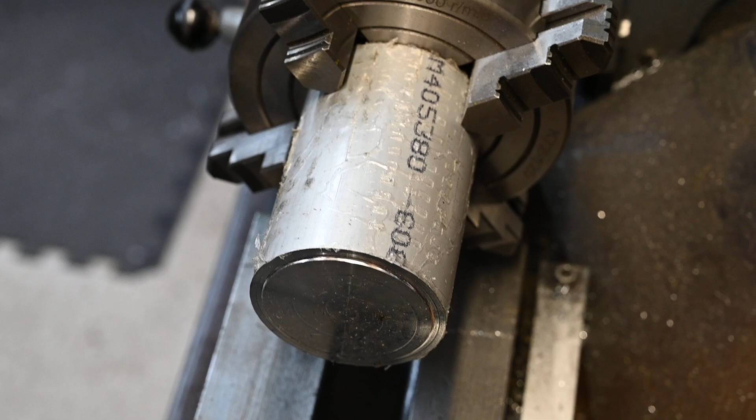Right, this is a piece of 7075 T6. This is going to be for the cylinder. There's a very small amount of lathe work to do today, so let's just get that done and then we'll be over to the mill for probably the bulk of this. I don't think it'll go back in the lathe again.

Well, that's the lathe work complete. This is the part we're forming, and that forms within the stock. This is the stock around the outside, and we've got to form this part there. So we're going to take it over to the mill now and do this part.

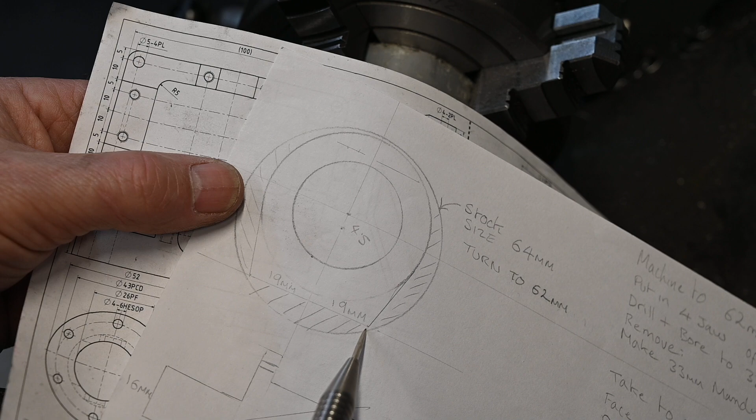I'm not sure if I'm going to part it off. I might part it off, or I might take it over to the bandsaw and cut it to length, but then we'll be over to the mill to machine this flat face, which will give us a second reference surface. We've got a good reference surface here.

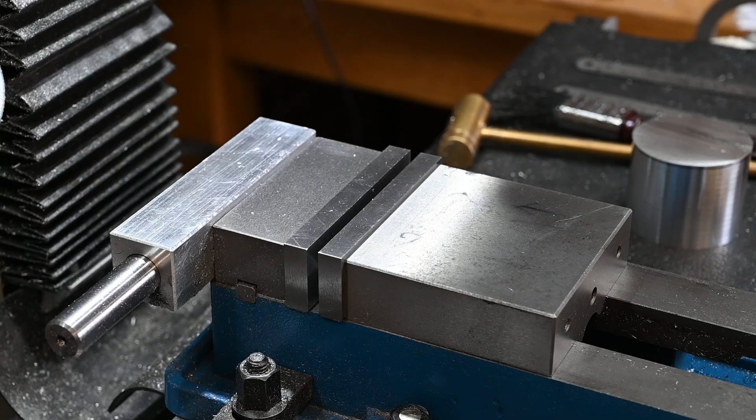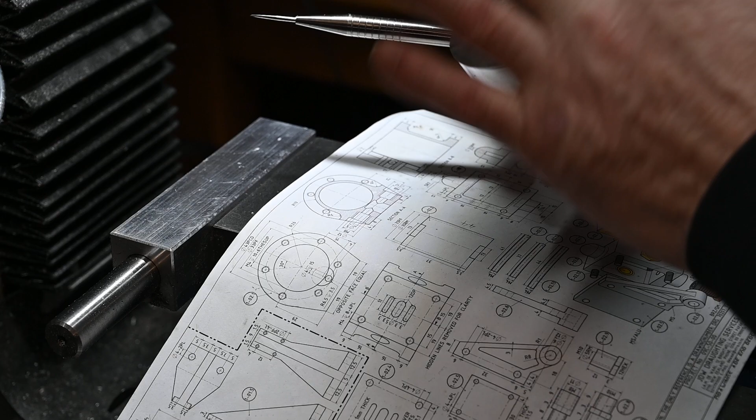The first job on the mill is to get the 19mm face, or the 38mm face. First job is to get this face milled off on that edge. I'll get that milled off and then I can get this down to size, but that's the first job, mill that flat.

Not too worried about marking the outer surface slightly, because that will come off eventually. This is just the slug for the final project. Right. Should be tight enough for that.

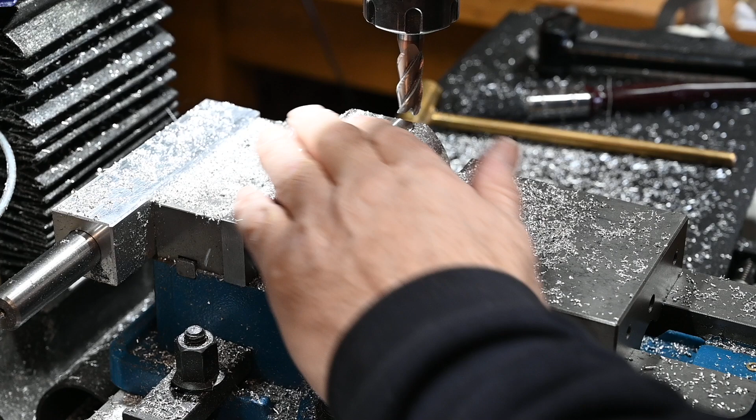Spot on. Right, we've got that faced off now to 38mm. It's a nice finish. Probably doesn't look that nice to you, but these little tooling marks, you can't feel them. So that's down. We've got a registration surface there now, and we've also got a registration surface there now, so we can start by there.

There's a little dimple in the middle of that, or is it on the plate? Yeah, it's just that little dimple in the middle. I'm just going to file that off anyway, and then I can face this off down to 44mm, which is the height we're looking for the dimension of the cylinder.

Cylinder being this part. We've got this part faced off now, so I'm going to get it faced off to height, which is 44mm, and then I'm going to offset it to get the centre of this bore, which is not centre of this. Right, I'm going to sit that down on a couple of tiny parallels.

Right, I can now get that faced off, get this down to 44mm. Okay, that's exactly 44mm now. I'm going to put a couple of stops on, so if I have to take it out, it's not going to, well no, I haven't got to take it out, so I'll just leave it as it is, I think.

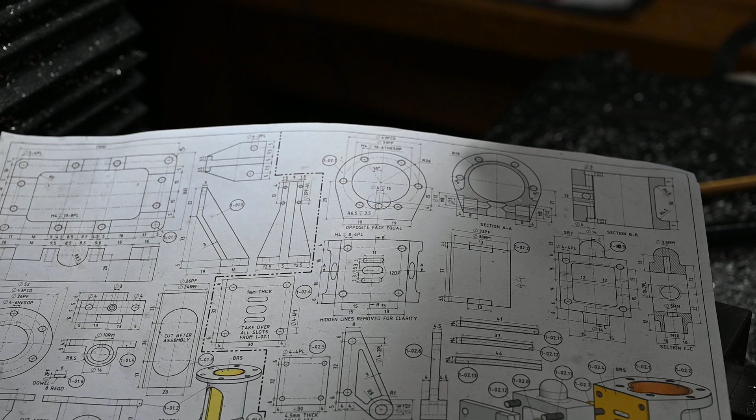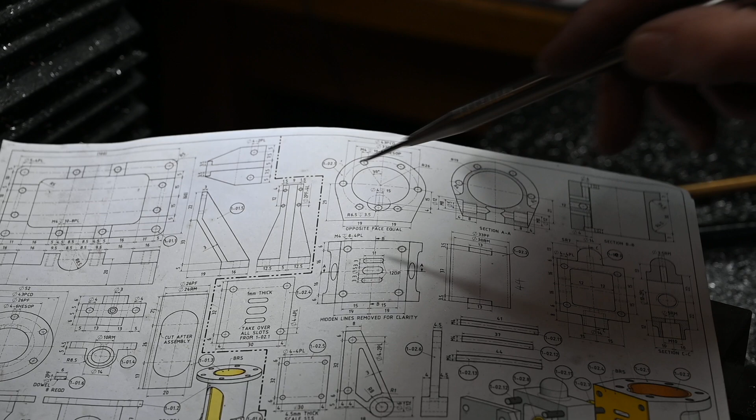I've got to do a bit of indicating now. I've got to come 29mm to the centre of this bore, and that centre widthways from these 2 points here is the centre that I've got, which should be the same as the centre from there, but I'll indicate that in so we can exactly find where that point is.

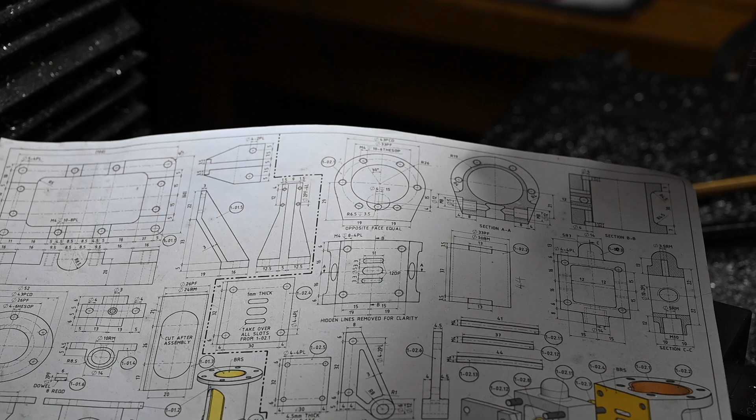And then, once I've bored this out, I'm going to make a mandrel to go in there so that I can transfer it over to the rotary table and cut these outside features once I've finished drilling the holes, etc. But I'm just going to put some stops either side, so when I take this out and flip it over for the holes on the other side, after I've done the bore and everything on this side, it'll go back in exactly the same position. That's the plan.

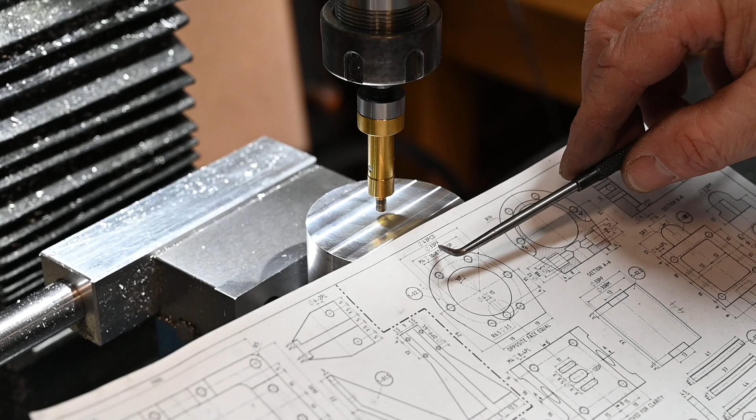Right, I've got it indicated in 29mm that way. So that's 29mm that way, and centre across there, which is also centre, double checked from these tangent points there. So that's exactly the centre now of the bore, so I can get on and bore that out. That's got to be bored out to 33mm, and that's a press fit because it's got to have a brass sleeve in it, which is this brass sleeve here. So I'll get that bored out now.

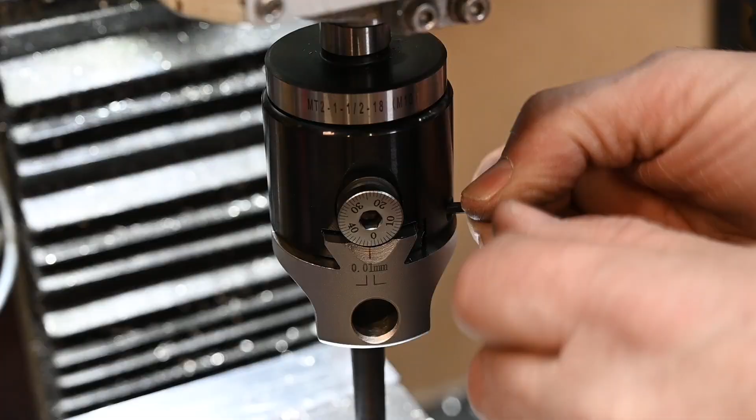Right, lock the quill down because I want to slacken the cutter off so when I bring it up it doesn't put a big helix, or if I just bring it up in one place, a scratch all the way up the bore. So I'm just going to slacken the cutter off so the cutter is clear of the bore before I bring it up. Right, that'll be well clear of the bore now. So now I can let the quill up without any danger of the cutter relaxing and putting a horrible mark in the bore. Right, we're bored out now very nicely to 33 millimetres exactly.

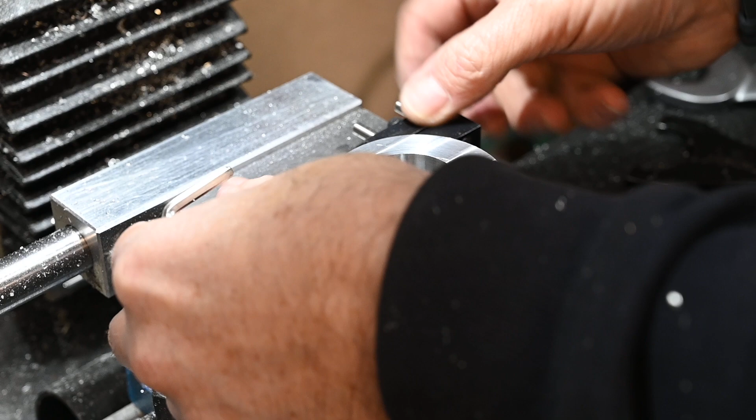Right, putting a couple of stops on, one there, one there. I'm sliding them up to the stock like that, both sides. So when I take this out and flip it over to do the holes on the other side, it'll go back in exactly the same position, so I can use the same DRO measurements as I am for this side.

I made these little stops in a previous video. If you're interested, just look at my playlists and you'll find them.

I'm using the hole feature on the DRO to drill the 6 holes. They're 6 equally spaced holes, which are these ones, 10mm deep. So I'm going to drill them out 10mm deep, and then I'll come back round using the same coordinates from the DRO to tap each one, just for the pressure on the tap follower thing.

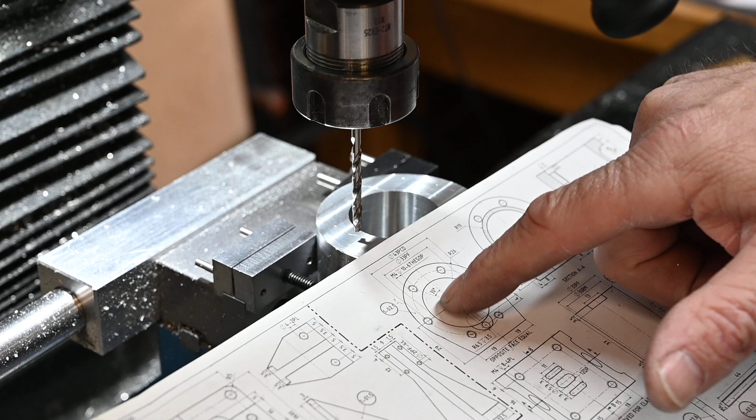So yeah, anyway, I'm just going to drill out these 6 holes, and then what's this one? We might drill this one while we've got it in here at the same time. No, I think I'll drill that after the sleeve is in, because it might come right on the edge of the sleeve actually. No, I'll leave that for the time being. Just going to drill these 6.

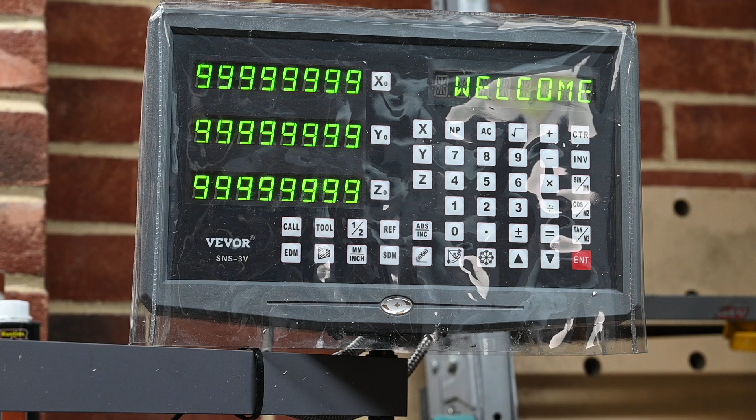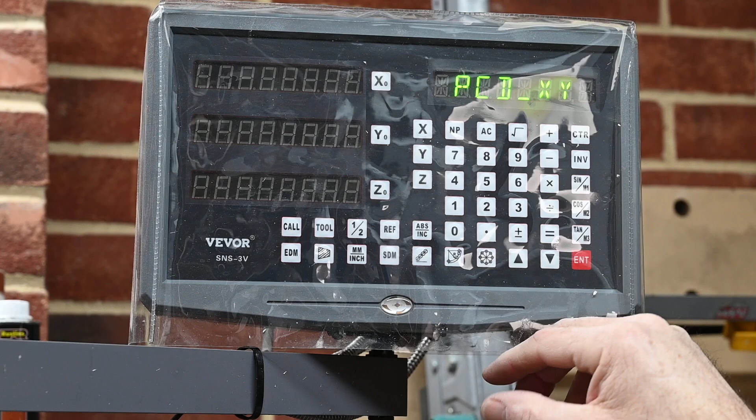I'll just show you how I set it up on the DRO. I just go into the PCD X and Y, because X and Y is what I want the coordinates for, and then change it to X and Z, etc. So I want that, I'll press enter. You center the mill and press enter.

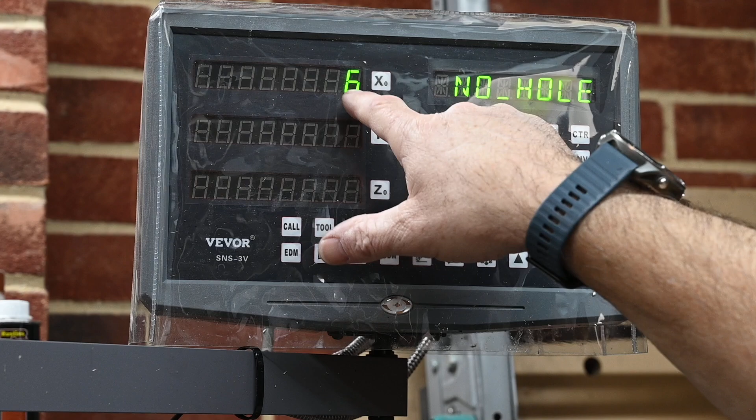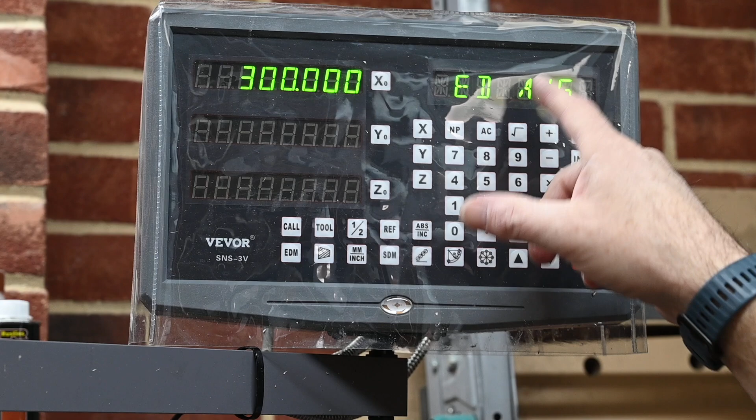Then you set the diameter of your circle pattern, how many holes you want. Well, I want 6 in this case. This is the start angle. If you want the start 90 degrees from center, then the start angle is 0. The end angle is where you want it to finish the bolt pattern, and then it gives you the position of each hole in one.

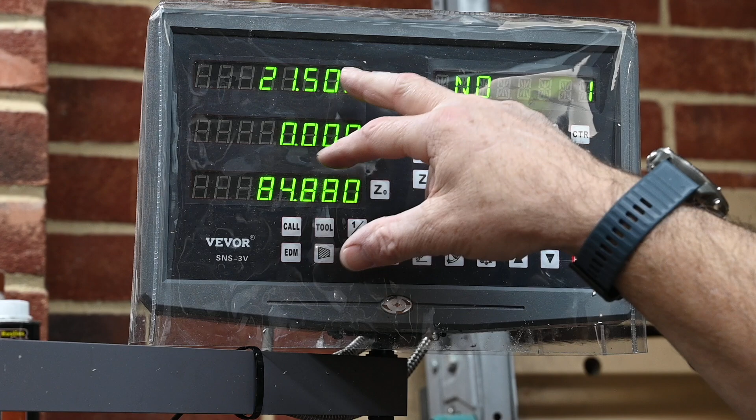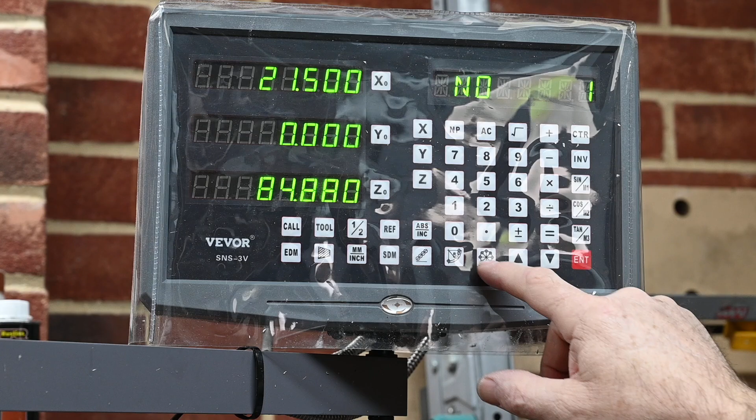So you just move the table until these read 0 for each hole, so you can go through all of the holes individually, and it gives you the coordinates for every one. Back to absolute. Absolute is if I now zeroed this, because it's still zeroed to the center of my workpiece, or the center of the diameter of the circle.

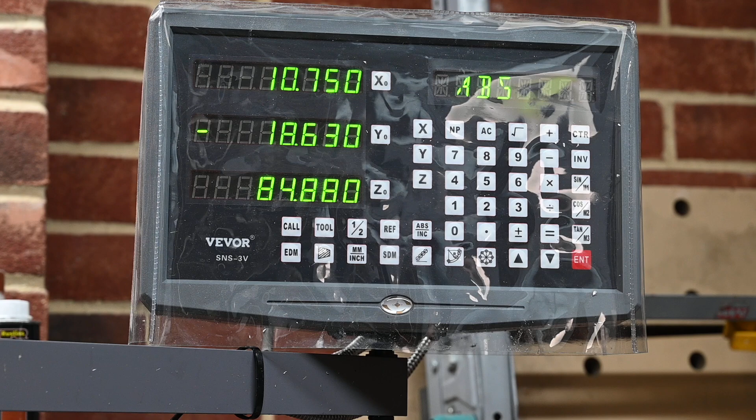So yeah, hope that explains. It's not a how-to, it just explains that when I said I'm gonna do it on the DRO, that's what I do to get the hole pattern.

Okay, that's the holes in. Now they're 3.4, I'm using a 3.4 bit, they're M4 with a 0.7mm pitch. You could go 3.3 if you wanted, but 3.4 will be fine. 3.5 I'd have probably got away with on aluminium, but you're right on the edge of the tap then. But anyway, this is going to be easy enough to do, so I'm going to tap these out now using the same coordinates. I'm going to start with this one and just follow the coordinates round.

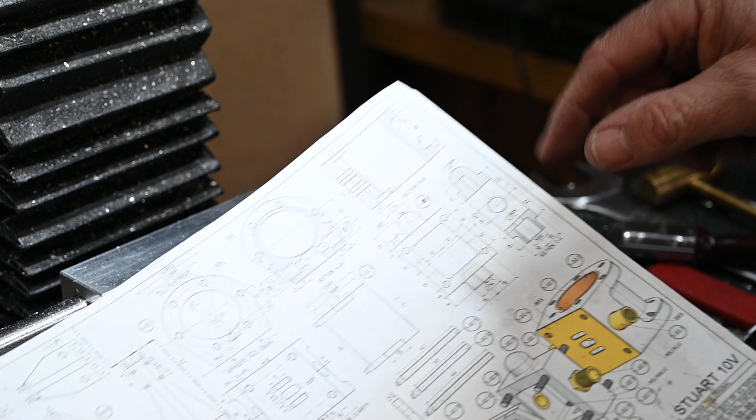I've got 2 straight bits, let me just show you, hang on. I've got these 2 shapes here, straight edge there and a diameter or radius, whatever you want, there. So I'm going to do that, and also I'll be putting the ports in, whether that's in part 2 or that might be a part 3, because I've got quite a bit of milling to do there.

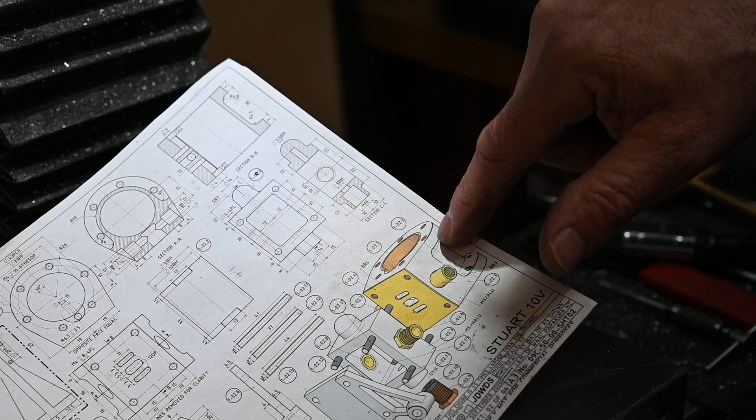I've also got to do this feature mill around the outside. If you notice on here, you can see the screw holes coming through the feature mill. Well, I'm going to offset the feature mill a little bit so you don't see the bottom of the holes. That's the plan. Anyway, thanks for watching.

I'll just show you this last one because I put a bit of tape on there which gives me the thread depth on the tap, so I know when I'm exactly down to 10mm to the bottom of the hole. There we go, exactly down 10mm. Let's just show you that.

These holes are 10mm deep, so I've put this on exactly 10mm from the point to the bottom of that, because what I don't want to do is not realise I'm at the bottom of the hole and keep turning and, because it's aluminium, end up chewing the thread out.

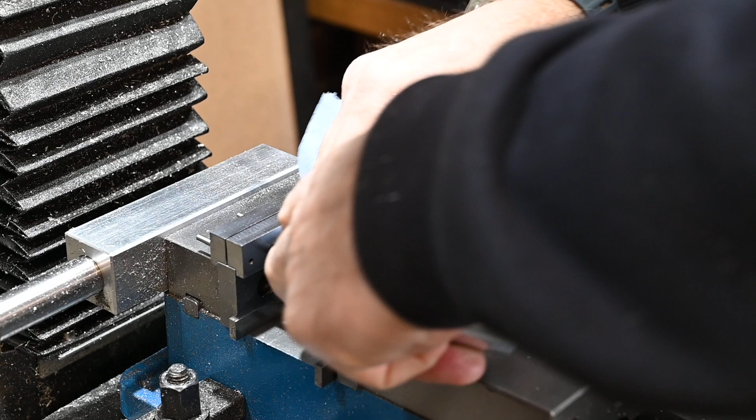Right, I just want to show you this bit. This is what I was talking about by putting these stops in. By putting those stops in, I can now put this back in exactly the same position as it was when it was up the other way, so I don't need to reset the hole places or recenter it for the DRO. I can now go straight ahead, drill these holes out and tap them.